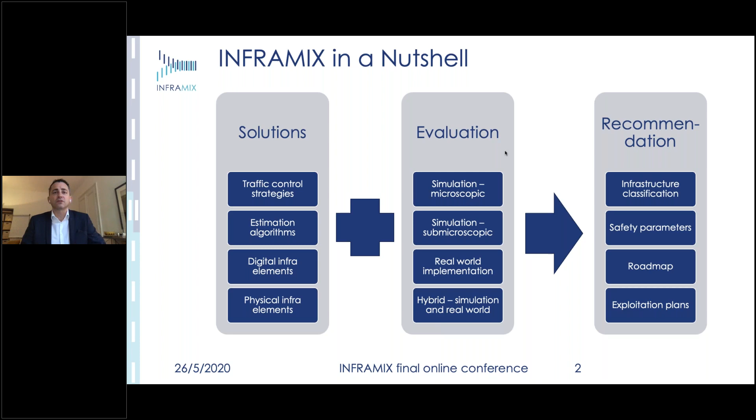This led us to, I think, some major recommendations for future programs and projects. We developed an infrastructure classification scheme. We developed safety parameters. We developed a roadmap. And of course, we looked into the detailed exploitation plans of the developed solutions.

So, of course, INFRAMIX is one of many infrastructure-related projects dealing with this kind of automation readiness, as we call it. All key platforms work on this future infrastructure perspective now. When we started the project 3 years ago and started to develop it almost 4 to 5 years ago, I think we have been really overestimating how fast automation will come and also underestimating the role of infrastructure.

Now, platforms like CEDR, ERTRAC, IRF, ASECAP, and also mainly, of course, on the European level, the CCAM platform are working on this future digital infrastructure perspective, on the physical and digital elements, on the data quality, on the maps, on the scenarios. So where do vehicles need what kind of guidance, on the needed communication infrastructures, but also the legal requirements and digital road codes. And this goes more to a future systems approach where we define in a common sense the roles of users, vehicles, and infrastructure of the future, also supporting new mobility services.

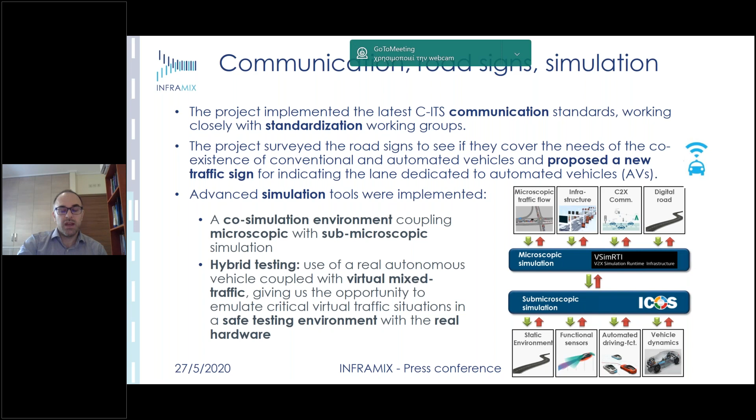In the area of traffic control, we developed several control strategies. Here I try to highlight the most important findings. First of all, the speed recommendations had a positive impact in terms of safety. The time gap adaptation controllers showed up to 50% increase in traffic efficiency compared to the scenarios where we don't apply any kind of control.

We saw a small disruption when we used lane change recommendations. This, especially in dense traffic, created underutilization of the road capacity, and also created a slightly riskier traffic situation because of the weaving effects from asking vehicles to change lanes.

Also, applying a variable speed limit controller close to bottlenecks like on-ramps, off-ramps, tunnels, and so on, we saw increased traffic efficiency by up to 14%, even with a low penetration rate of connected automated vehicles.

And the most important outcome for investors on the road infrastructure side is that when we employ connected automated vehicle technologies, we don't need to invest a lot of money in the actual infrastructure. We need fewer variable message signs and fewer spot sensors. This also leads to lower maintenance costs of the infrastructure.

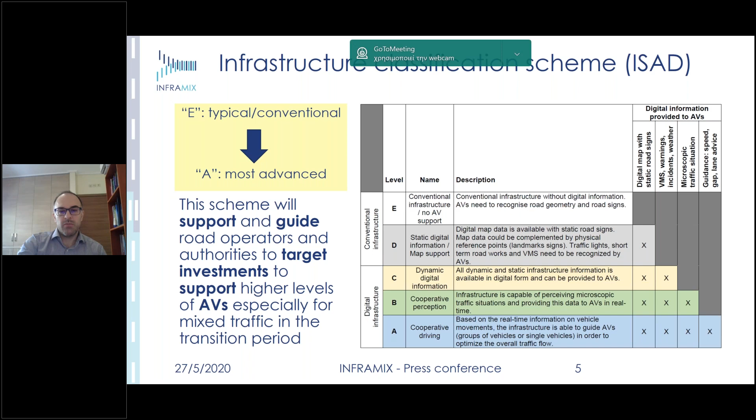And this classification scheme, this taxonomy, as we mentioned it, can really support and guide authorities, operators and investors to target what they need to go from Class D or Class C to Class B or A in order to have more digital features in their infrastructure. So it's a really important outcome. It's discussed a lot in several fora, in CEDR, in the CCAM platform. And we are very proud of this outcome.

And the last part that I would like to highlight: for all that we did, we wanted to check that the users appreciated our developments. So we did a lot of questionnaires. In total, we had 170 participants from all the ITS stakeholders that participated in our workshops and our demos. The key outcome was that the majority of the involved partners thought that our developments will bring positive effects, positive changes in terms of safety and efficiency in traffic.

Although another issue we have to take into account is that they were not sure exactly how this will be implemented, the specific characteristics of this improvement. So they had a very good idea that we're going in the correct direction, but they could not mention the exact characteristics of this improvement. And the 3 metrics we followed during this user acceptance work were behavior change, willingness to use, and the perceived usability of all the technical implementations. And this was above 70% in all our questionnaires.

Okay, then let's go. I would like to bring to the table the perspective of us as a road operator. We were one of 2 road operators participating in the project, and we operate

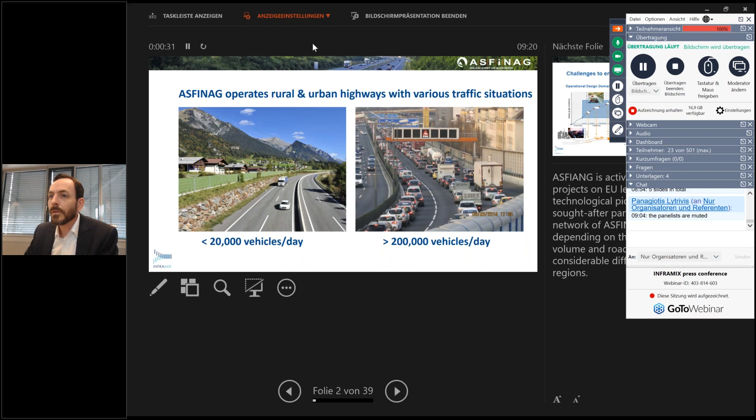Bernd, I'm sorry to step in. It's just I can see your presentation mode, just for you to know. Okay, so it's a little bit strange. So I will have to change. So now you should see the presentation as it is. Is that correct? Yes. Much better.

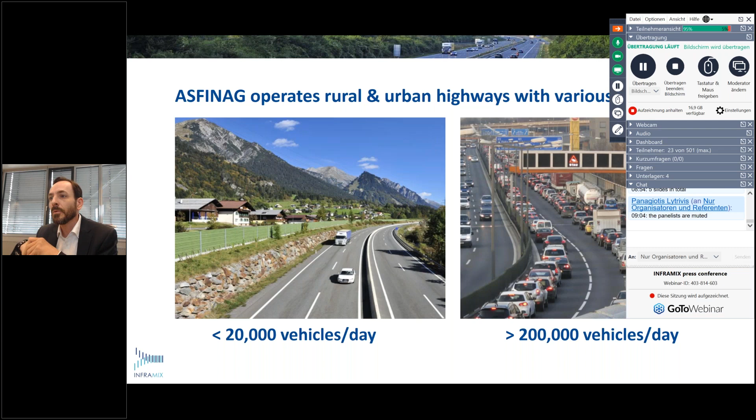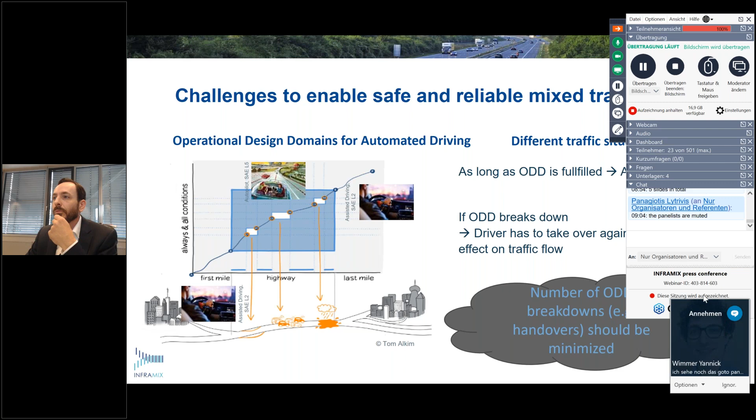And the automated vehicles can only drive automatically in certain situations that have been programmed and tested. And between those different parts of a stretch, you have to drive yourself. So if this operational design domain is left, then you have to drive yourself. And we want, of course, to minimize the situations where we don't.

Bernd, I'm sorry to step in again. I'm so sorry. It's just I can see some other windows on your screen. Maybe you can put them down. And also, I could see your GoToWebinar box. Okay, it was covering your presentation. Now everything is fine. Thank you.

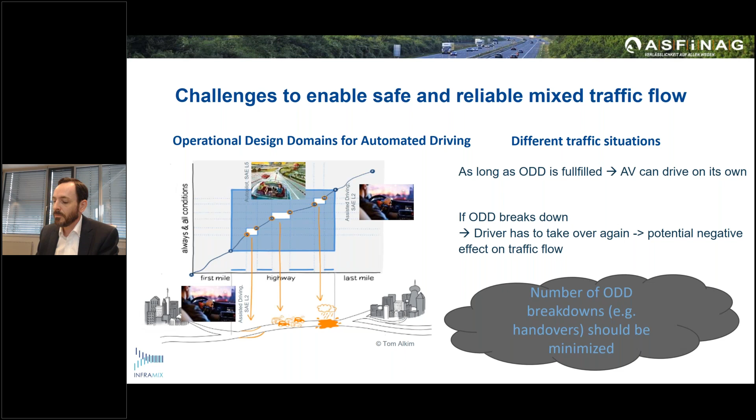Okay, thank you. So what we want to do is to extend the operational design domains and to support them, as Panagiotis already pointed out, with infrastructure support. So if we can support the automated vehicles with additional information, then they can drive in more situations automatically, and we expect a positive impact on the traffic flow. And that's basically what these infrastructure support levels can do.

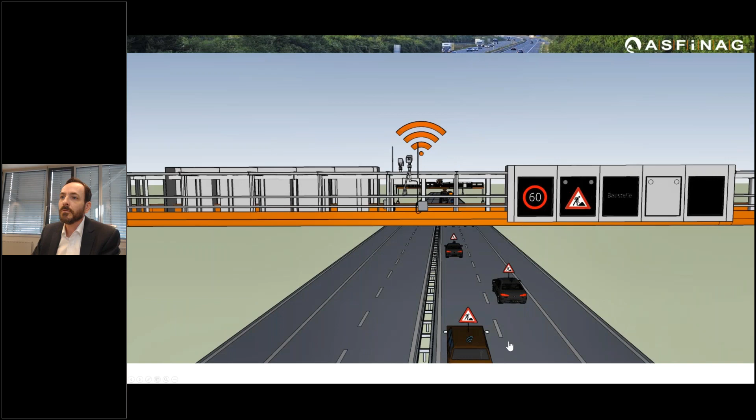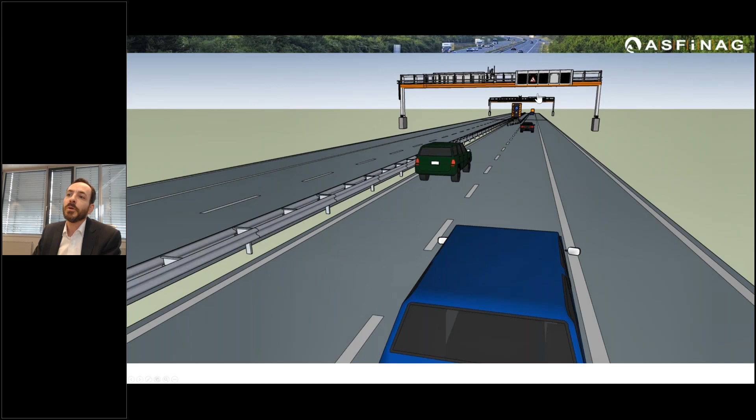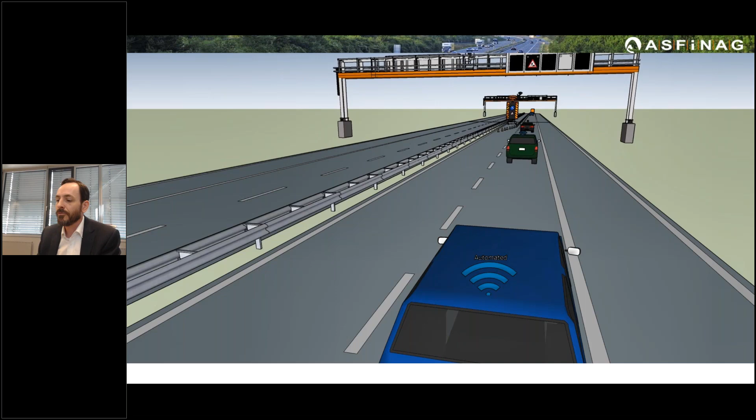So how could this work, for instance? I have a short video here. So now you see roadworks appearing on the left, and the cars need to merge into the right lane. So the cooperative infrastructure that is deployed on the VMS will inform the vehicles that they have to blend in, and also inform the automated vehicles on the right lane to have a certain gap that the vehicles can merge into. This is only one little example where infrastructure can help to make the traffic flow more efficient, and that's what we want to achieve.

So in INFRAMIX, basically we looked at 3 scenarios. One was the roadwork zones, as mentioned, with the road lane closure. Then a bottleneck, for instance, cars entering the network and having to merge into another lane, and then a dynamic lane assignment purely for automated vehicles. So these were the three scenarios investigated, and we had a couple of interesting findings, of course, there.

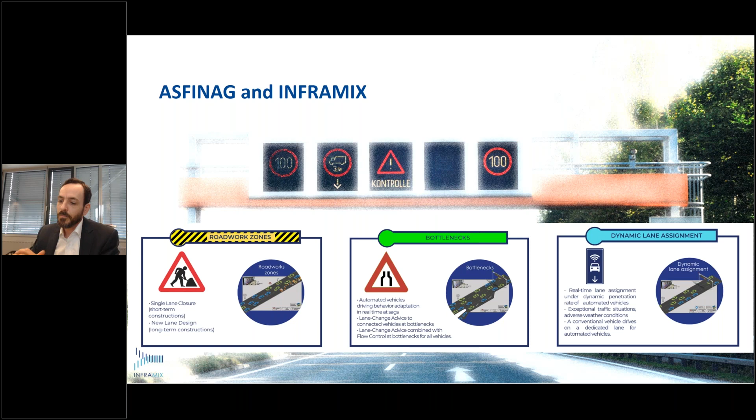So a big success from our point of view is that the communication tests for cooperative systems were very successful. So we were able to send out not only the C-ITS messages for the day 1 use cases that already are production ready, but also, for the first time in Europe, the day 2 messages, for instance, as mentioned before, the gap advice, so how much distance is needed that other cars can merge into. And of course a couple of other messages and use cases.

Then this infrastructure support for automated driving scheme was developed, and what we also did in Austria is that we analyzed which portions of our network can support which of these levels. And the next step will be to look into what we need to do to adapt parts of our network to have even better support for automated driving.

Simulation was already mentioned by Panagiotis, and was of course a highlight, because this hybrid testing looked at the different situations with different testing methods, and so it is a very complete picture that we got there. And what we see, of course, is that we need control strategies to have a better traffic flow as the number of automated vehicles increases. And of course, C-ITS will be the core feature in these strategies. And we see that C-ITS will make a big difference in safety as well.

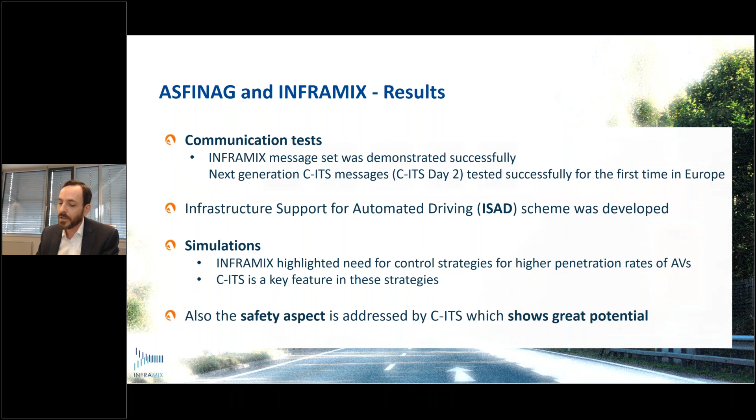What we also did is the testing of the C-ITS Day 1 use cases. Of course, they work. This is this roadworks warning, this is in-vehicle information, and of course, hazardous location information. And the first series vehicle, the Golf 8, also can benefit from this scenario.

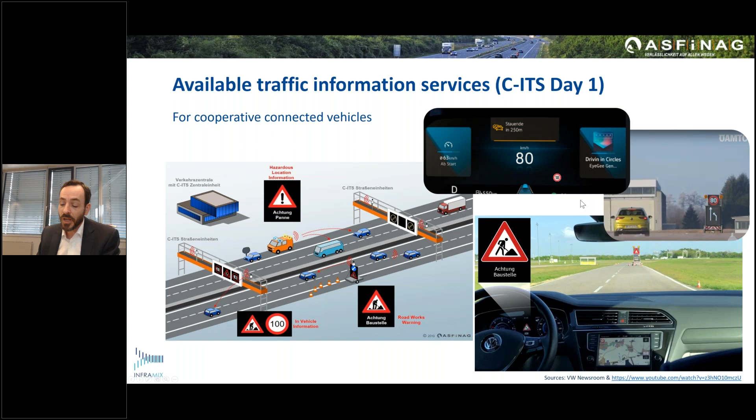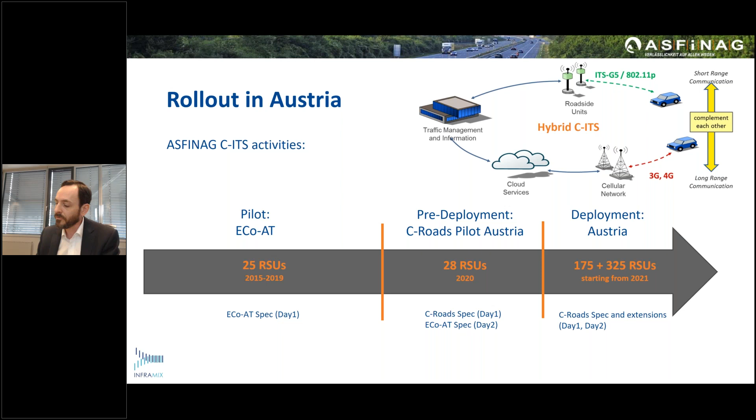So what we will now do is roll out cooperative technology in Austria. We already deployed a couple of roadside units during the last years in the ECo-AT project, but also, of course, in C-Roads. And we are in the final phase of a tender to procure even more of these C-ITS stations. And from next year on, we will equip roughly 500 roadside units in the next couple of years. So this will make a big difference in the support for automated vehicles in the future.

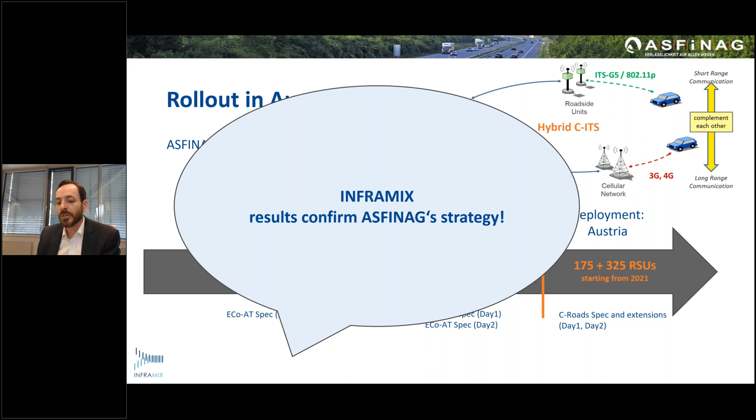So to sum it up, what INFRAMIX showed us is that we are on the right path, and that, of course, C-ITS is a big contributor to safe and efficient mixed mode traffic, and we are happy that in INFRAMIX we could make the next step and benefit from the simulations and the testing. Thank you.